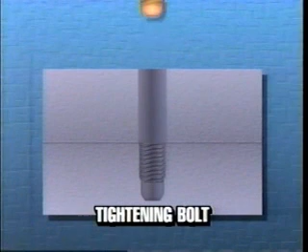How a bolt works: as a bolt is tightened, the exposed threads stretch and the bolt becomes longer. The more it is tightened, the further it stretches.

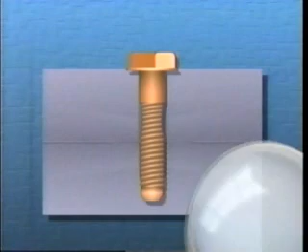This stretching allows the bolt to remain tight when exposed to elements like temperature change and vibration. Proper tightening causes the bolt to stretch like a spring and then return to its original length when loosened.

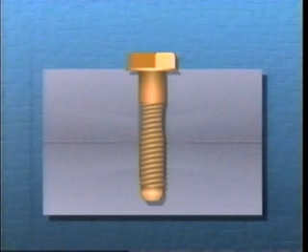Over-tightening the bolt will cause it to weaken or break. Excessive tightening causes the bolt to stretch permanently and neck down in the threaded length.

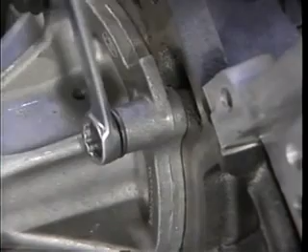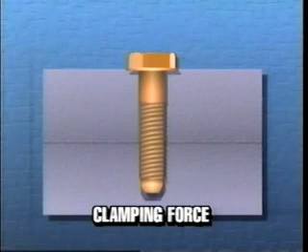The reason for tightening bolts is to provide clamping force. Clamping force is the amount of pressure applied by a tightened bolt. A properly tightened bolt provides the best clamping force or load possible. Over or under tightening reduces the amount of clamping force the bolt provides.

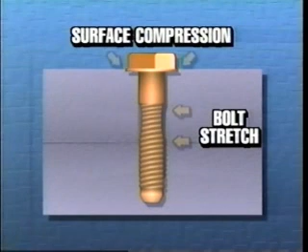Bolt stretch is one feature of the bolting process. Surface compression is another. As load increases, the bolt and surfaces act like springs. The bolt spring stretches, and the surface spring compresses.

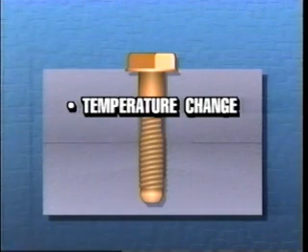How well the surfaces join becomes very critical when exposed to conditions like changes in temperature, vibration, and the type of gasket material used. Using multiple bolts to clamp two surfaces together makes proper clamping force hard to obtain.

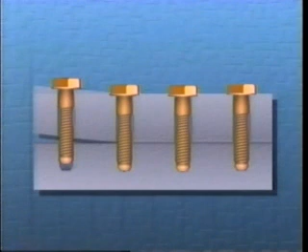During tightening, the surface springs cause the tension of one bolt to affect the tension of the other bolts. How even the load is distributed between the bolts affects the durability and quality of the joint.

Three other factors that affect clamping force are fastener precision, cleanliness, and lubrication. These conditions must be controlled for a durable joint.

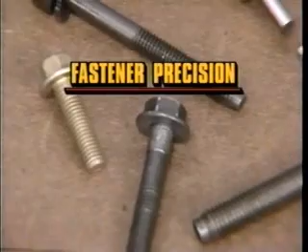Fastener precision is determined by the material used in manufacturing, the quality of the threads, and the amount of variation allowed between the bolts. The closer these factors are controlled, the higher the quality.

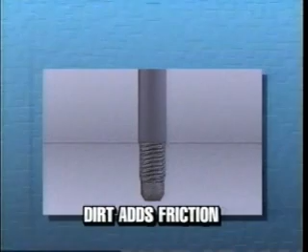Thread and surface cleanliness during assembly is critical. The threads of a fastener must be clean for proper tightening. Dirt on the threads adds friction or resistance to tightening. This reduces the amount of clamping force the bolt delivers because friction uses up some twisting force.

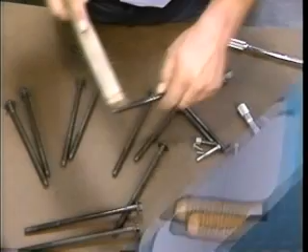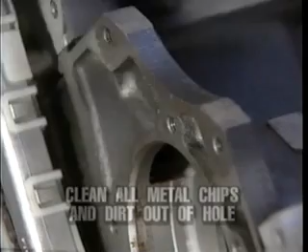The bolt threads are cleaned using a wire brush. The threads of the bolt hole are cleaned using a tap. After using a tap to clean a threaded hole, be sure to clean any metal chips and dirt out of the hole. Failure to do so defeats the purpose of cleaning the threads.

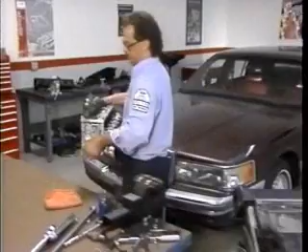As a rule, feeling resistance while hand tightening a bolt means the threads need cleaning. The surfaces being clamped together need to be clean and smooth. Any dirt and old gasket material must be removed from the surfaces before assembly.

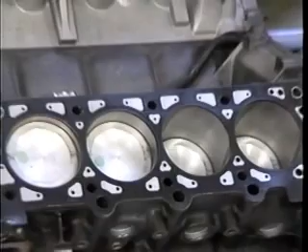The metal gaskets used on the 4.6-liter engine require that a special method be used for gasket removal. Do not scrape the cylinder head or engine block surfaces. On other engines, be careful not to scratch or gouge the surfaces when scraping away old gasket material, especially if

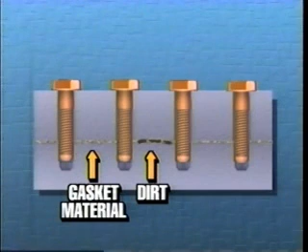the surface is aluminum. Dirt and old gasket material will lessen the clamping force being applied to the new gasket. Having to compress the dirt or old gasket material uses up some clamping force. This reduces the force available for sealing.

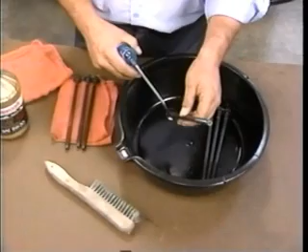Thread lubrication allows for proper bolt tightening. Apply a light film of engine oil to the underhead and threads of the bolt, not the bolt hole. This reduces friction during tightening.

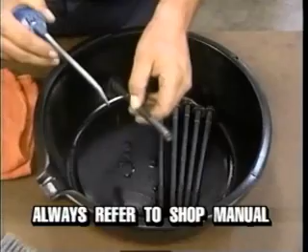Some applications do not use oil on the bolt threads. An adhesive or lubricant may be required, or the threads may need to be dry. Always consult the shop manual and use what is specified. Bolts differ in strength, size, and thread.